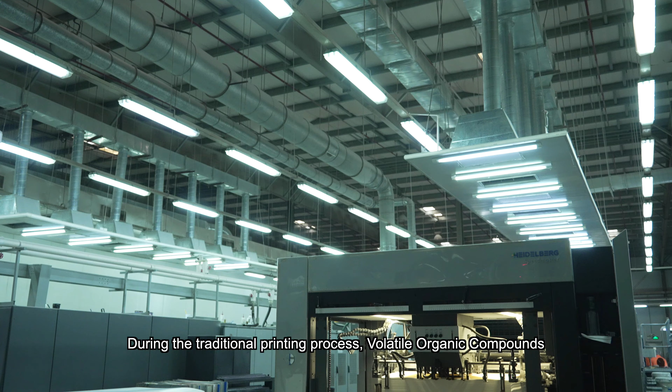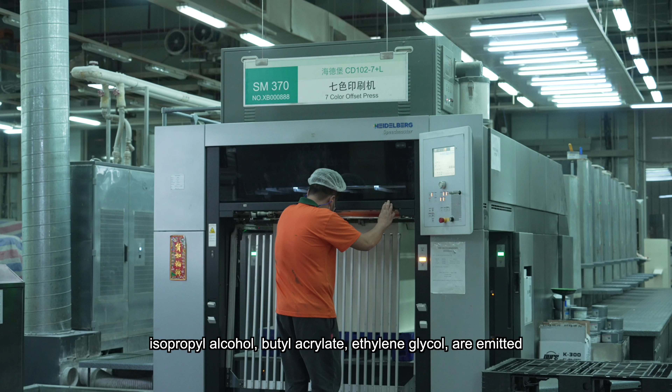During the traditional printing process, volatile organic compounds, commonly known as VOC, mainly include dimethyl carbonate, isopropyl alcohol, butyl acrylate, and ethylene glycol. These pollutants have adverse effects on human health and the environment.

To assist factories in improving their environmental performance, the governments of Hong Kong and Guangdong launched the Cleaner Production Partnership Program in April 2008. This program subsidizes Hong Kong-owned factories located in Hong Kong and Guangdong Province to adopt cleaner production technologies and practices, thereby facilitating energy saving and emissions reduction.

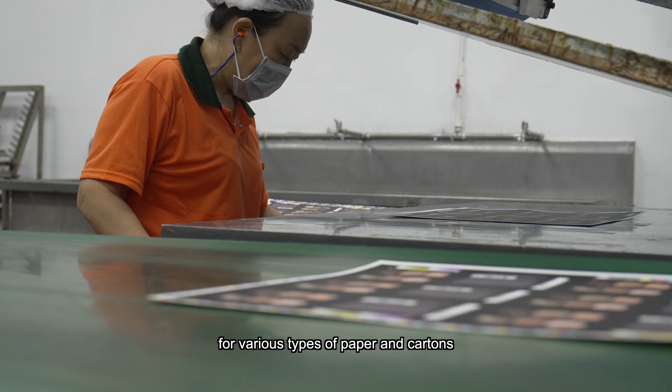This printing factory in Dongguan engages in printing services for various types of paper and cartons. The use of inks, solvents and cleaning agents in processes such as silkscreen printing, varnishing and UV treatment of printing surfaces releases VOC.

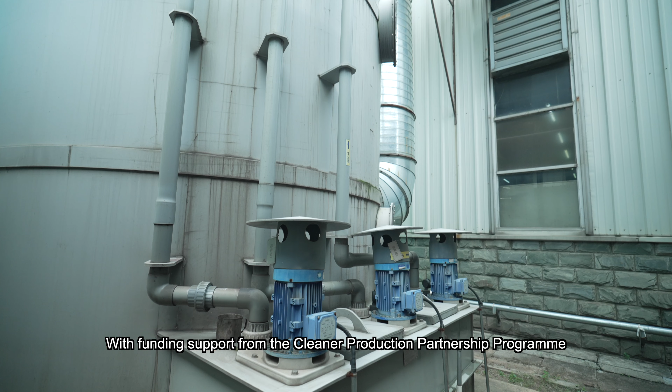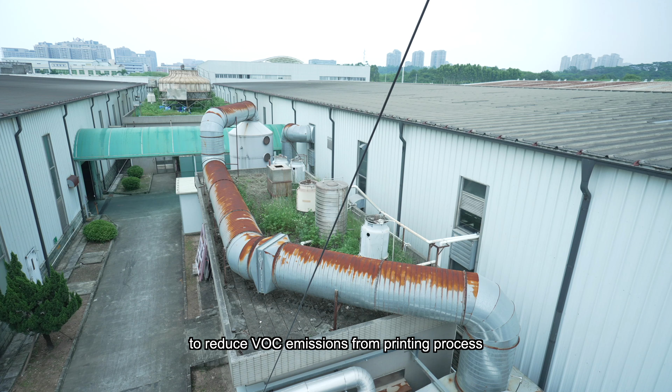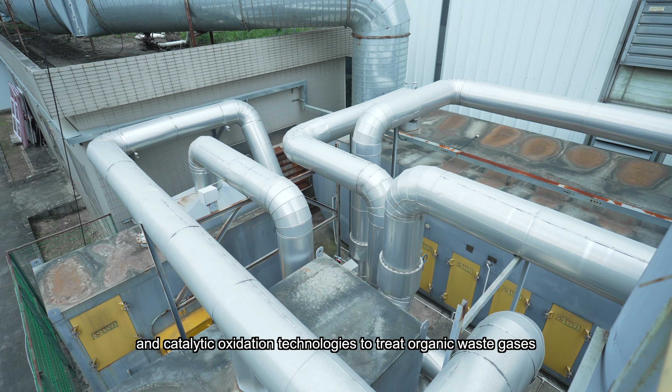The factory currently adopts the Zeolite Rotor Concentrator and Catalytic Oxidation technologies to treat organic waste gases. The operating principle involves pre-treating a large volume of low-concentration waste gases through high-efficiency filtration. The gases are then pressurized by a fan and sent to the zeolite rotor for adsorption and concentration. After being filtered by adsorption, the waste gases meet emission standards and are emitted through the chimney.

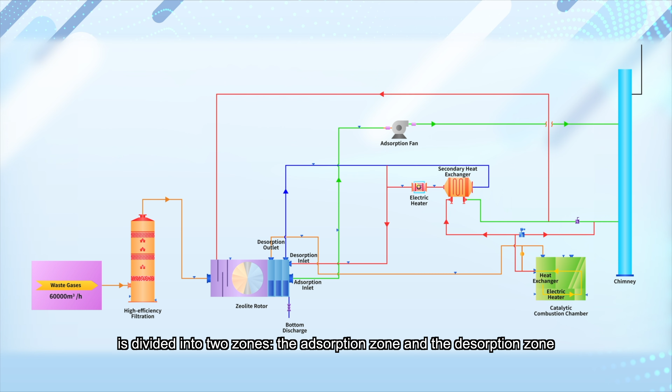The zeolite rotor, which rotates continuously and slowly, is divided into two zones: the adsorption zone and the desorption zone. The adsorption zone is responsible for purification, while the desorption zone is subjected to a small volume of high-temperature hot air, typically at 180 to 200 degrees Celsius, for thermal desorption. The small volume of desorbed high-concentration waste gases then enters the catalytic combustion chamber for oxidation.

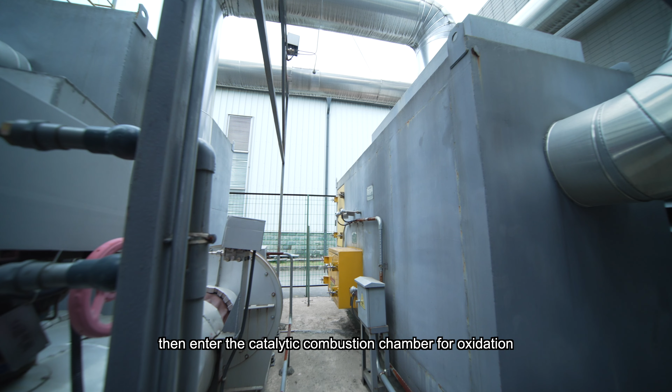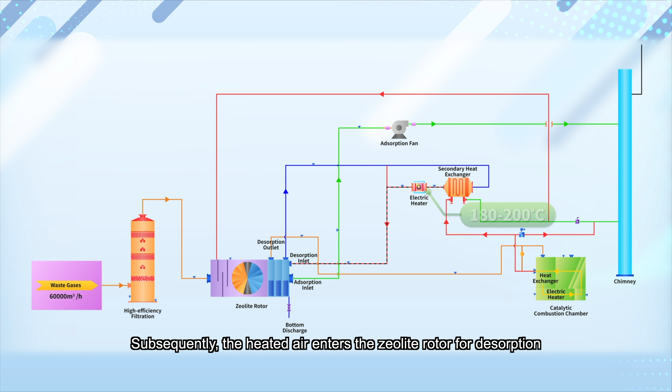The hot air used for desorption originates from fresh air introduced by a fan or gas that has been purified after adsorption. This hot air first passes through a secondary heat exchanger, where it undergoes heat exchange with the high-temperature air from the catalytic combustion chamber. It is then heated to 180 to 200 degrees Celsius by an electric heater. Subsequently, the heated air enters the zeolite rotor for desorption.

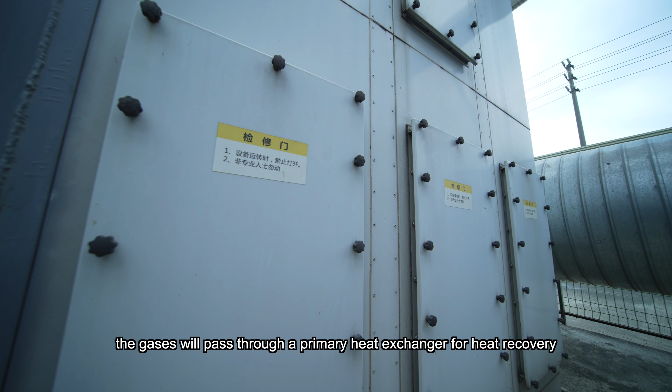After being desorbed by zeolite, the waste gases will enter the catalytic combustion chamber for oxidation. Following combustion, the gases will pass through a primary heat exchanger for heat recovery. The heat recovered will be used to preheat the waste gases entering the catalytic combustion chamber. Finally, after further heat recovery through a secondary heat exchanger, these gases will be discharged through the chimney.